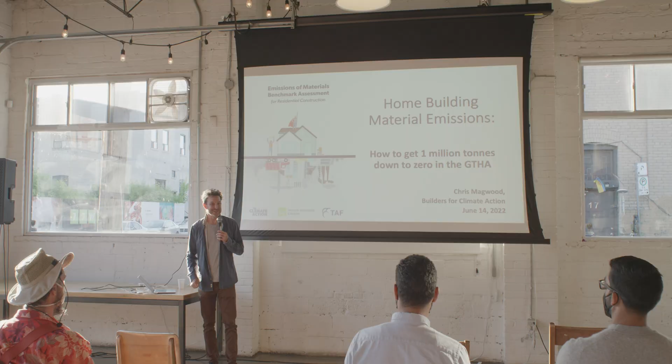And it's a study of the material emissions of residential buildings in the GTHA with the idea of, how do we try to get those emissions from where they are now, which is about 1 million tons a year, down to zero.

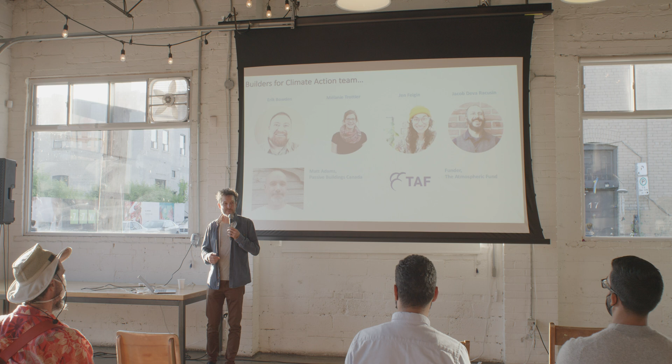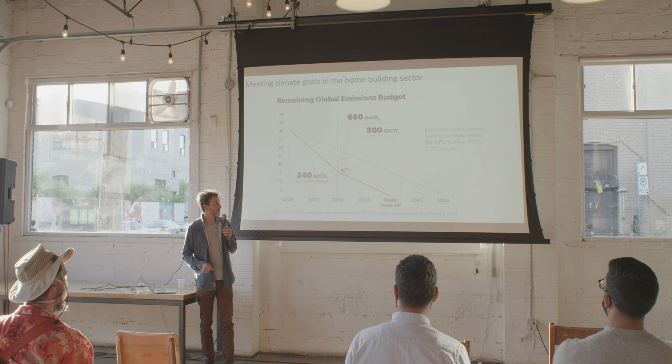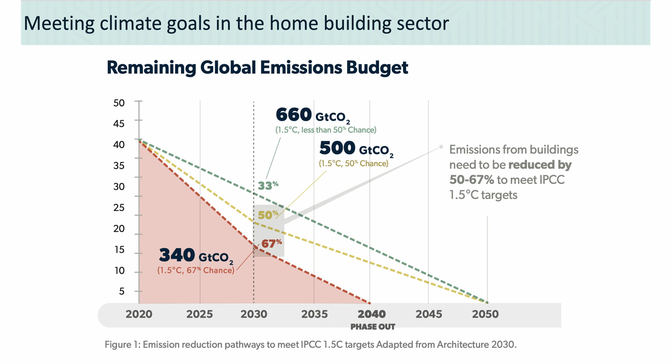So framing the problem is, I think, pretty easy. Everybody knows that if we're going to try to keep things to no more than 1.5 degrees Celsius of warming, we have to get emissions down pretty quickly by 2030 to sort of like 50 to 67% of what they are now. And so that's everything. And because I'm a builder, you're probably builders, what we're thinking about is homes and how do we get there with houses.

And just to sort of frame the challenge that's in front of us, both the Canadian government and here in Toronto, the Toronto government have targets for reductions, which for Canada by 2030 is 40 to 45% less, and net zero by 2050. And then Toronto has a specific 50% less in the building sector by 2030, and then like the Canadian government, down to net zero by 2050. They're great targets, and it's exciting to sort of be part of the movement to see if we can actually meet them.

So currently, when we think about those targets, so when Toronto or the federal government says we want to cut building emissions by 50% or get them down to net zero, they're really only talking about operational carbon emissions. So the energy a building uses, and then whatever's supplying that energy, the emissions associated with it, that's kind of what's been taking all the focus.

And so what we've been looking at Builders for Climate Action is what we call material carbon emissions. And those are the emissions associated with extracting, transporting, and manufacturing building materials. And a pretty good percentage of the full emissions profile of a building material happens in that upfront phase. If you're kind of in the embodied carbon world, you'll hear that term upfront embodied carbon, and that's what we're sort of talking about, the stuff before anybody moves into the building. What did it take to just make the materials that go into the building?

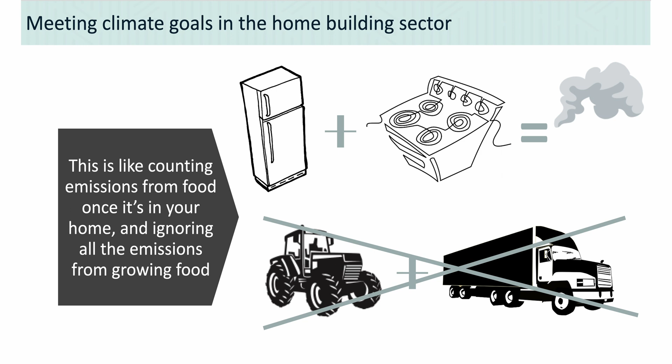And the analogy that I like to use for ignoring those material emissions is like if we wanted to think about the emissions from our food system, if we just looked at, well, what does it take to put my food in my refrigerator and cook it? I'd go, well, there's my emissions from my food. Not thinking about materials is like not thinking about the whole food production system. There's this whole other side, and just like with food, that other side is actually bigger than the side that we sort of pay attention to in the home.

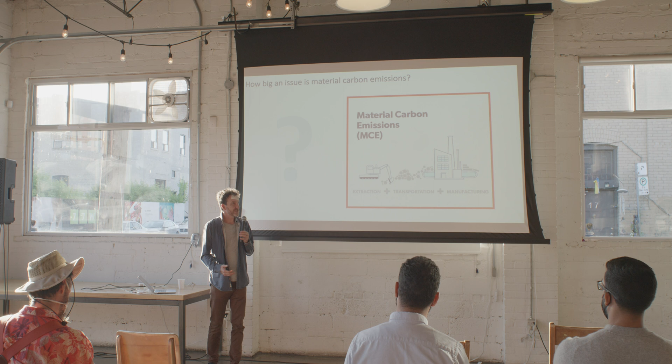So when I first started doing this, I was thinking about it on the scale of one building. I was literally just trying to back-of-the-envelope figure out, hey, this house we're doing, I wonder what the material emissions from this building are. And I got numbers, and the numbers seemed big, but what was interesting to me is, well, what happens if we look at this at scale, from more than just one house? And so the EMBARC study gave us a chance to really do that.

Before we did the EMBARC study, we did a study for Natural Resources Canada in 2021, where they gave us 190 model homes from across the country at a whole range of different energy efficiency levels, using a whole bunch of different fuels in different cities across the country. And so we got a real range of embodied carbon results, but the average across those 190 homes was 150 kilograms of emissions per square meter of heated floor area.

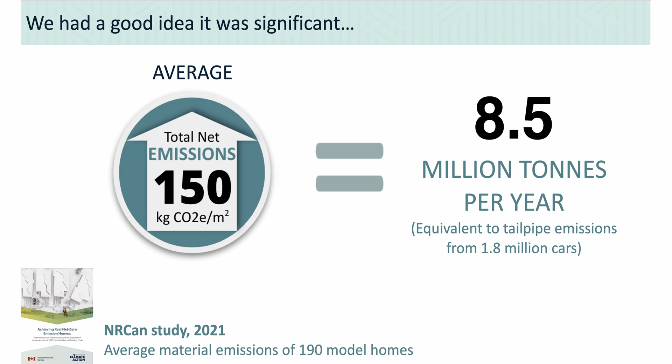And if we then take that and multiply it by the number of square meters of that kind of housing stock that gets built every year, we get 8.5 million tons of emissions per year just from low-rise residential building materials. So it's, I think, a much bigger problem. When we handed the report over to NRCan, you could hear jaws hitting the floor. I don't think anybody was expecting to see results at that scale. And so it's really great to be able to start to understand the full impact of this issue nationwide.

Part of that NRCan study involved applying different material palettes to those buildings. We had a set of plans that NRCan considers residential house standards across Canada, and we applied different sets of materials to all those different plans. And what we saw was if we just picked all the materials that are currently available and affordable and code compliant from retailers and big box stores, and put them all into one house, we could get that house from the 150 kilograms per square meter average down to 2. So essentially a more or less zero carbon house.

And if we did that across the country, that would take the 8+ million tons of emissions and drop it down to 250,000 tons. So, this vast change. I think that would be at the same level as when Ontario shut all its coal-fired power plants down, which is the single biggest emission drop in North America. That's achievable on the scale of residential buildings in Canada.

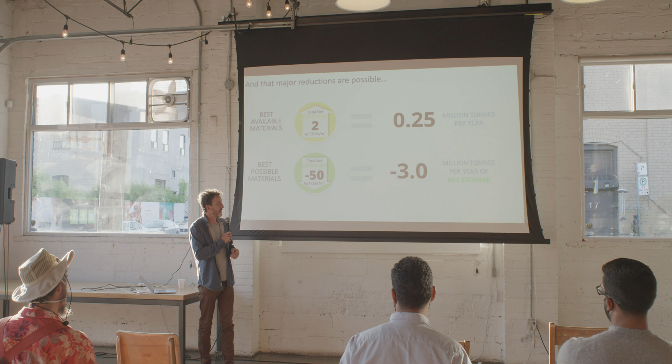And so we can make buildings that still have materials with emissions, but they have all this storage. And if you use enough of those materials, the whole building ends up in the territory of net storage, and sometimes pretty heavily so. Minus 50 kilograms per square meter was the best result from the NRCan study. We built a building for the Teachers Union in Lindsay, Ontario, that has 160 kilograms of storage per square meter.

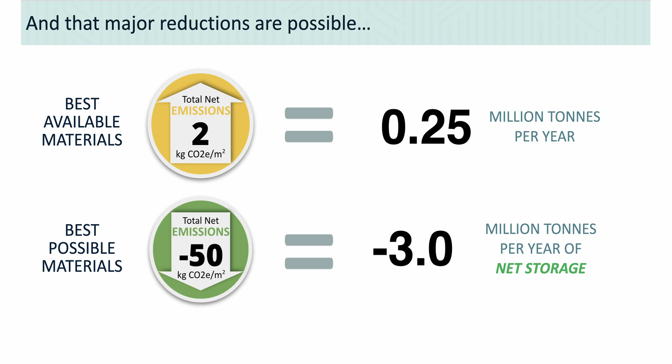So that kind of result is possible. When we're struggling with climate change, we tend to struggle with how are we going to get 5%, 10%, 30% reductions? And what we're talking about here is, how do we flip the paradigm around completely? Now there are no emissions, and we're not just not making the climate worse, we're actually making the climate potentially better by making these carbon storing buildings.

So we knew that going into this EMBARC study. We'd done that study for NRCan, but for the EMBARC study, we decided we needed to build a really robust, resilient, and easy to use tool, which we called BEAM. We ran all the plan sets through BEAM, and what we focused on were upfront carbon emissions, like I said before, the harvesting, transporting, and manufacturing of materials.

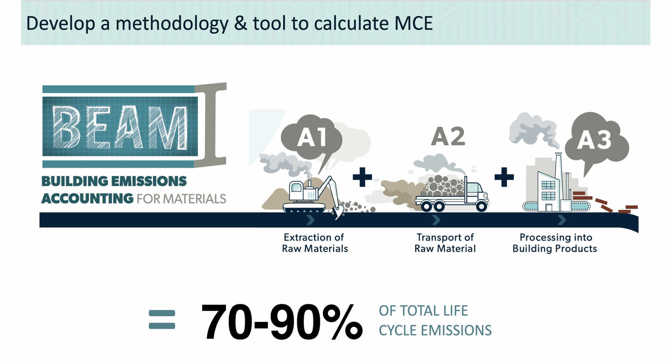That's what we were counting, and we counted those because they are the majority of the emissions from building materials over their entire life cycle. It all happens up front, and because it happens up front, these are the emissions that we need to fix today. There are end-of-life emissions and things like that, but with building materials, they're pretty far down the path, and if what we have to do in 50 years is figure out what to do with those, that'll be a pretty sweet place for us to arrive at. So, right now our focus is on these upfront emissions.

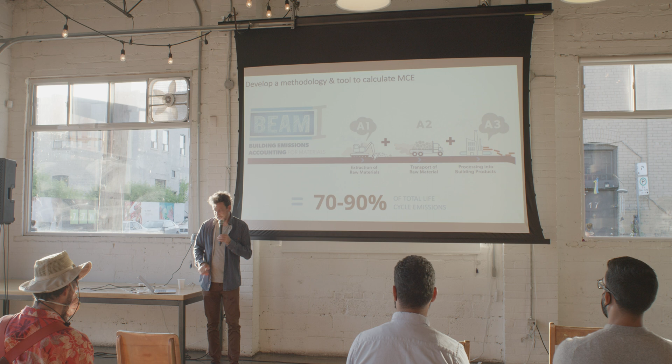So BEAM focuses on the structural, enclosure, and partition materials. We sort of picked those. I think they kind of picked themselves, partly because that's the bulk of the material, like in terms of mass in the building. It's the majority of the stuff that goes into a building. But also from a data point of view, this is the stuff that right now we actually have good data on. So there are enough environmental product declarations in these material categories that we can count everything that falls into the structure, enclosure, and partitions.

But what we can't count, because the data doesn't really exist, is any of the mechanical gear. There really aren't any environmental product declarations on plumbing, electrical, HVAC equipment. There's very little on things like millwork, stairs, appliances in particular. So all of that is not included. So when I'm giving you the numbers and the results for EMBARC, just keep in mind that we're really capturing somewhere between 50 to 60% of all of these material emissions in a building, because they're the only ones we have the numbers to count right now.

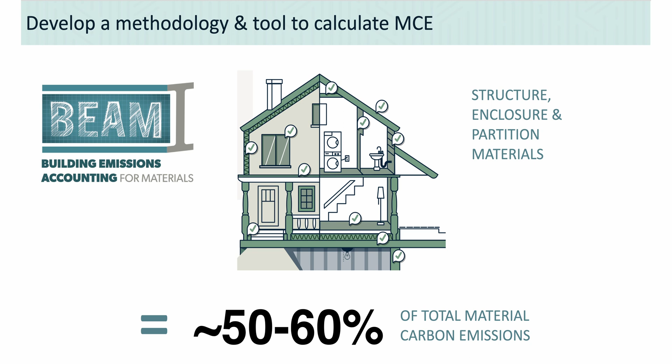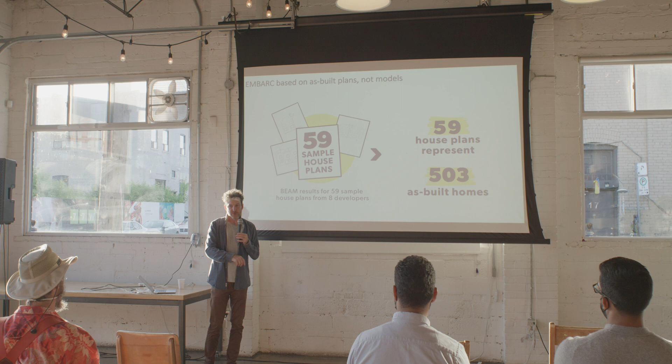And so what we really wanted EMBARC to do was reflect real as-built homes, because we'd done this study for NRCan, which was, they have model plans, and then we put model sets of materials to those plans, which was great for understanding the parameters of the topic. But what we really wanted for EMBARC was, how are people building houses right now, with exactly those materials?

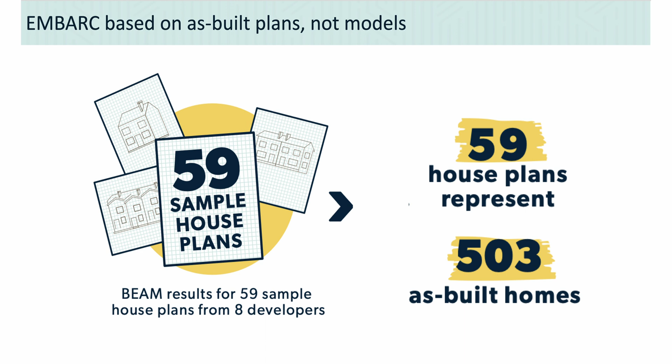So we put a call out to developers in the region. 8 developers responded with plans. They gave us a total of 59 different sets of plans. Many of those were built multiple times, the same house over and over. We were mostly going for production builder, tract builder kind of homes, because that's mostly what gets built. So we had these 59 house plan sets, which totaled 503 as-built homes, all built within the last 2 years. So it was a really good sample, and at a large enough scale that it feels pretty representative of what's going on.

And so the top level result of all of this is that the worst home in the study had 561 kilograms of emissions per square meter of heated floor area. So over half a ton. That was a real jaw-dropping thing to see. The study that we did with NRCan predicted that if you put all the worst materials together, you could end up over 500, and then it was like, oh yeah, people do that. It's not just a pretend model that we made. It's a set of materials that some builders actually do build with. So that was at the high end.

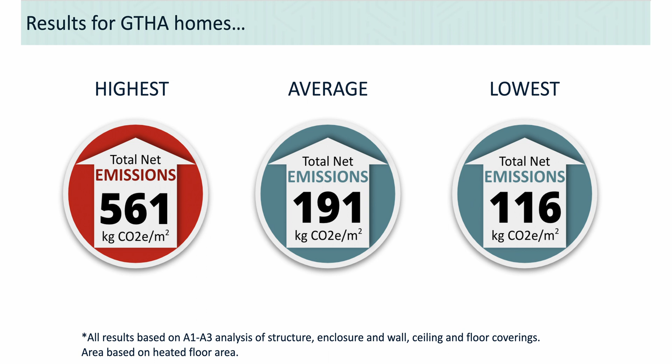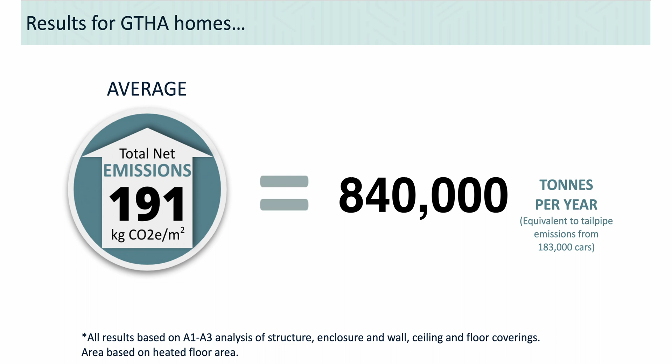The average across the set of plans was 191 kilograms of emissions per square meter, and the best result was 116. So that was the range, the high end, the low end, and the moderate bit in the middle. And at that average, and for the number of square meters that gets built in the GTHA, that means from the emissions we're counting, there's about 840,000 tons of emissions per year from GTHA homes. So we build about 17,000 single family homes, duplexes, and row houses in the GTHA in a year. So we took all the municipal data about how many square meters get built of all the different kinds of plans we had, and that was the average across that set.

And like I said, there's a lot of materials that aren't being counted. All the mechanical stuff and the appliances and things like that. Our estimates of what those are, just going from how much raw material, like how much ABS plastic is in plumbing pipes, how much copper is in a heat pump, all of those sorts of things, gave us the sense that we're pretty much counting about half the emissions.

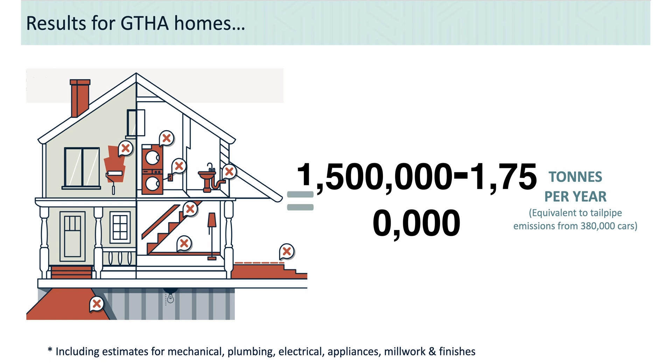So, if we were able to count everything, our assumption is that in the GTHA, the homes are actually responsible for about 1.5 million tons or a little bit more. So it's bigger than I thought for sure, and bigger than most people think.

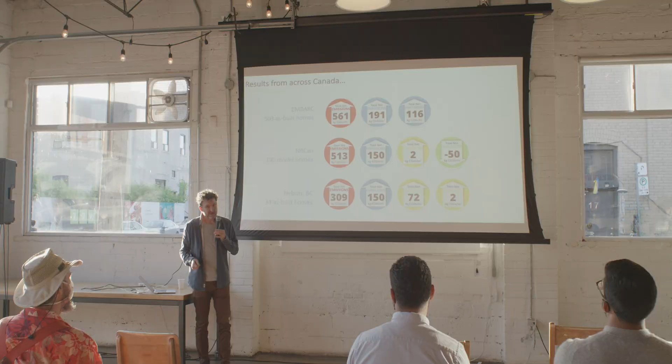So across the country, the results up there from EMBARC, that's the ones I just showed you. I talked about the study with Natural Resources Canada, that's the set of results in the middle. At the same time, or just a bit actually before we did EMBARC, we did a smaller study for Nelson, BC, where we did 34 as-built homes in that region. And what's interesting is they kind of mapped relatively closely, especially in the average. Like our model average for NRCan and our actual average for Nelson was identical, and just a little bit lower than the average for the GTHA.

So this is kind of what the best, worst, and average results looked like across those three studies, which both gives us a sense that things are a bit different in different parts of the country, but also that we have a pretty good sense that there is kind of an average in the country, and it's somewhere between 150 and 200 kilograms per square meter.

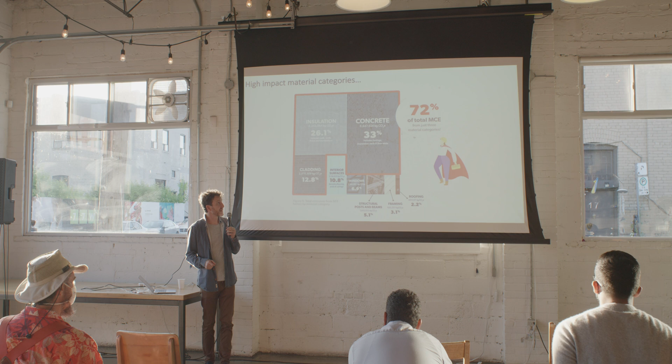And what we also learned from the EMBARC study, and this was mirrored really closely in the Nelson study, is that essentially 3 material categories are 70% of those emissions. And those would be concrete, insulation, and cladding. And the percentages were almost identical between the Nelson study and the Toronto region study. And so that gives us a pretty clear sense of, well, if we're going to tackle this, we know exactly where we need to tackle it.

There's no point sweating your roofing. It's 2% of the building typically, and so we're not going to make our big wins in roofing and framing, in any of the structural posts and beams. Windows is a little bit bigger, but we can't do much about that. Like, glass is glass, and so until somebody invents a low carbon way of making glass, that's going to kind of stay. So if we really concentrate on those big categories, that's where we're going to really drive change.

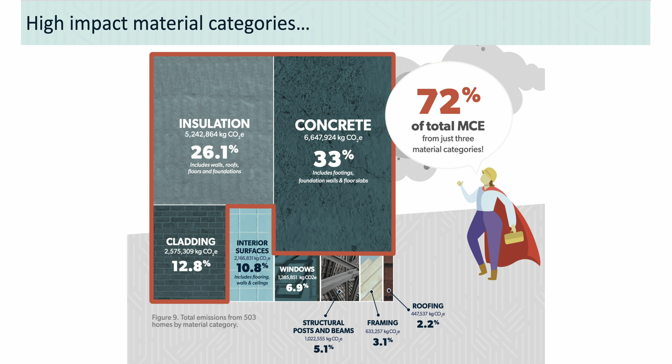So as part of the EMBARC study, we took not the worst emitting home, because it was way higher than average. We took the next highest home, which was 262 kilograms of emissions per square meter, and we thought, well, what could that builder have done to do better? And so we went through some stages of essentially material replacement, and the first step was the little green bar. That first reduction was, what's the lowest carbon concrete mix we can get in the GTHA right now, and what's the carbon footprint of that, and let's substitute that. So we had a little bit of a win from changing the concrete.

This big bar, the second bar, is what if we change the attic and the wall insulation from whatever it had been to cellulose. And because cellulose is one of those carbon storing materials, it doesn't just lower the emissions, it sort of makes them negative. So you get essentially a really big win from doing that. The next bar over is changing the continuous foam insulation on the outside of the building to a wood fiberboard insulation. And again, that's one of those carbon storing materials, so it has a relatively big impact.

The next bar is changing brick cladding. Brick is almost like 10 times higher emissions than pretty much any other residential kind of cladding. So if you change from brick to just about anything else, you get that next little win. And then the final bar is taking things like flooring products and drywall, and just looking at all the environmental product declarations and going, well, what's the lowest carbon drywall? What manufacturer has the lowest carbon footprint, and just switching out for the best available material. And those changes brought that house from 262 kilograms per square meter down to 66. So that's a 75% reduction in one of the higher emitting homes in the GTHA.

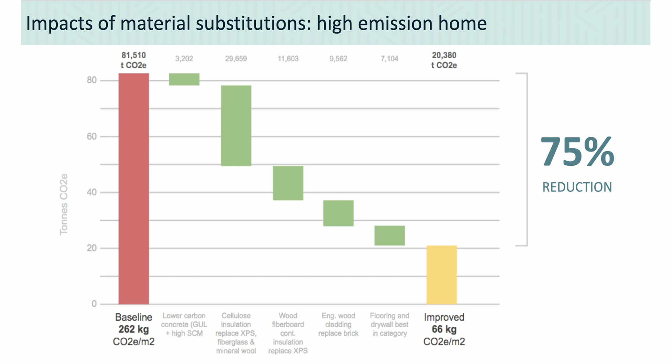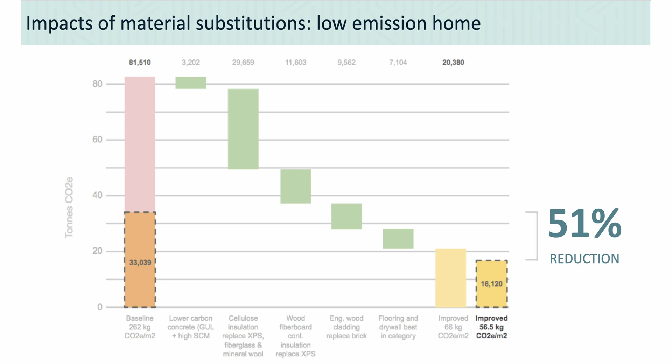And this substitution exercise was the best part of the whole study. I got to say, running lots and lots of plans through a calculator tool is not exciting, but when you see what pops out the other end, that is exciting. And it was exciting to do these substitutions because we realized, oh, Toronto has this 50% reduction target for buildings, and we just showed that you can do that, not in 8 years like today.

If builders in the region took that seriously, looked at that set of materials and went, yep, I can do that, then there we go. We've met Toronto's 2030 buildings target with both houses, the one that started off better or the one that was really high emitting. They're both at least 50% reduction, and that's what the city's aiming for, and so there's the roadmap to being able to do that.

The other thing that was exciting to look at was seeing that there was a tract builder in the GTHA whose suite of homes came in at this 116 kilograms of emissions. It's not the lowest number in the world, but it's 40% lower than the average. And this is not a low carbon builder. This is not somebody who is like, I'm going to set out to see if I can beat what's going on now by 40%. This is their affordable, business as usual, I'm just making homes to make a living. The way they do that is 40% better than the average.

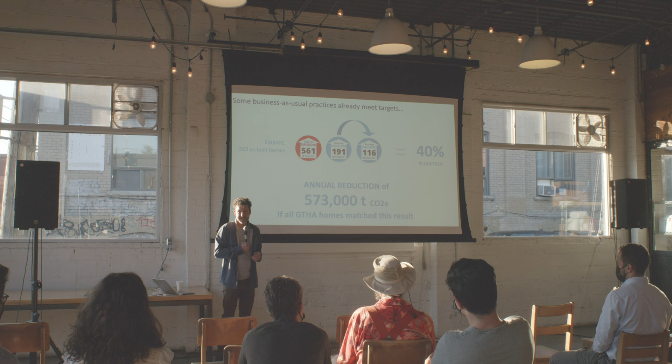And so what that tells me is this is doable. It's doable right now because there's somebody out there running a company, building a couple hundred homes a year at that level of emissions. And so if we want to get to 50% reduction in the GTHA, there's a builder who's already at 40. That's a pretty good start, and they know how to do that. They've got the materials down. They know it's affordable. They know it's meeting code. All of those questions that often come up about this. At least to get down to the 116 range, that's entirely doable.

If all the homes in the GTHA went from that average down to what somebody's already doing, that's over 500,000 tons of emission reductions per year. So that's on the table right now. If we could all do what that builder is doing, which is nothing special, let me tell you, they're making homes that look like everybody else's homes. There was no real conscious effort to make a low carbon home, but even if all the builders could get to that level, 500,000 tons of emissions a year is no small reduction to be able to make almost instantly if we wanted to.

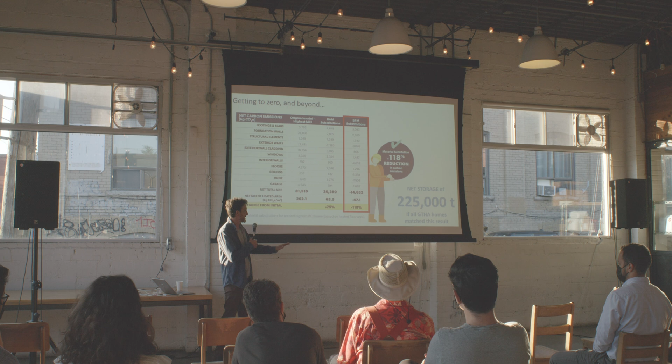And then, being the straw bale builder that I am, I wanted to push into that territory. So we did these affordable code compliant reductions and found that 75% reduction. And then we went one step further and thought, well, what if we insulate the basement with hempcrete and we put straw on the walls and do some other things like that. And we ended up in carbon storing territory, minus 47 kilograms of emissions per square meter.

And if we could do all the GTHA homes that way, that 800-some thousand tons of emissions that are happening would disappear, and we'd be putting away 225,000 tons of emissions per year.

So this is a little bit more far-fetched, but I've been building homes that do that for the last 25 years. All the questions about, will they last, do they burn, all that kind of stuff. They've been doing fine for a quarter of a century. I think we really can see that there is a pathway to being able to do that more broadly.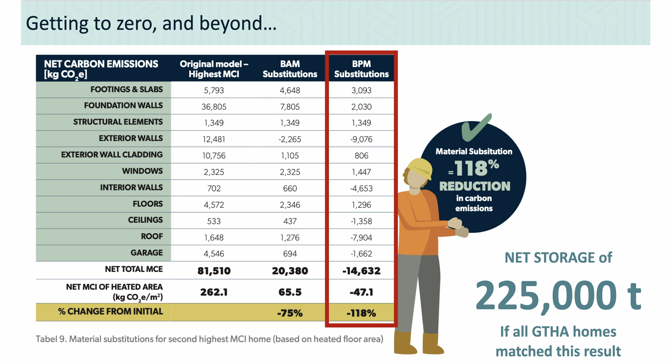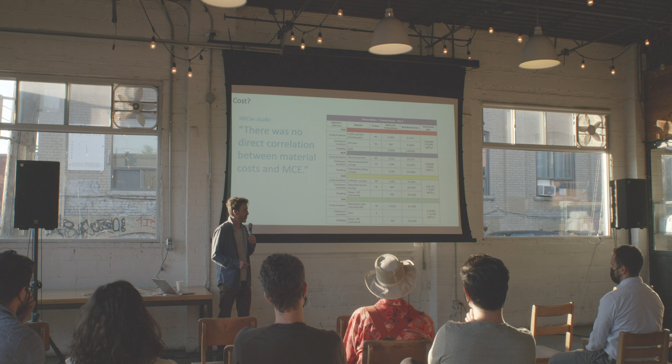And I know that the issue of cost always comes up. It wasn't in our scope for the EMBARC study to really delve into that, but for the NRCan study, they wanted us to look at material costs, so separate from labor, which can be a little bit misleading. But what was really interesting was we found absolutely no correlation between material cost and emissions.

Sometimes the highest emitting material was also the most expensive. Sometimes the lowest was the cheapest. Sometimes the lowest was the most expensive. They could fall anywhere in that range. The amount of emissions associated with the material did not predict its price.

And so, I think what that says is that you can be very strategic about it. You can figure out, dollar per dollar, where are the wins in terms of reducing the carbon footprint, and where are the things that currently you just can't go there because you can't bear that cost.

But the interesting ones here are in the middle range, where the price of those two wall systems was almost identical, but the emissions in this one are actually getting into the negative territory just for the wall system for exactly the same price. So I would love to do the cost study in more detail, but I really don't think that we necessarily have to be spending a lot more money to reduce the emissions of the buildings.

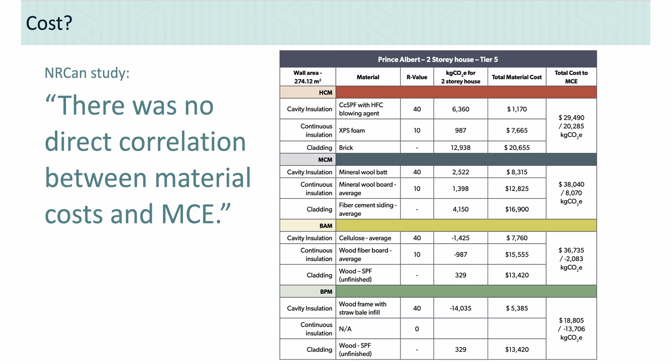So I know, being a builder and talking with builders a lot, that change is bad. My 2-year-old used to say that to me, change is bad, change is bad. And I feel like 2-year-olds and builders kind of have that same attitude. And so, my suggestion isn't that every builder in the GTHA start making straw bale homes tomorrow, because I know that's not going to happen.

But because we already know somebody is at that 116, it shouldn't be too hard for everybody who's in the average range to just start thinking about a 10% reduction per year for the next 5 years. That gets everybody to that nice 40% reduction in a reasonable amount of time, affordably, in a controlled manner, and is consistent with the national and the local goals for emission reductions. And then just keep going down that path.

If you think about 10% a year, it's not a big step to have to take, and especially once you've started making those steps, you don't have to change 30 materials on your next house. You can change 2 and do that for a year. Get comfortable with it, get that into your flow, figure out how to do it well, and then change the next 2, and then the next 2, and there's enough low-hanging fruit right now that transition over the next 10 years is, I think, highly doable.

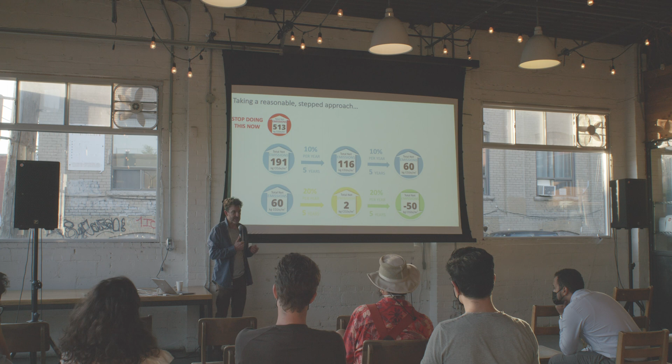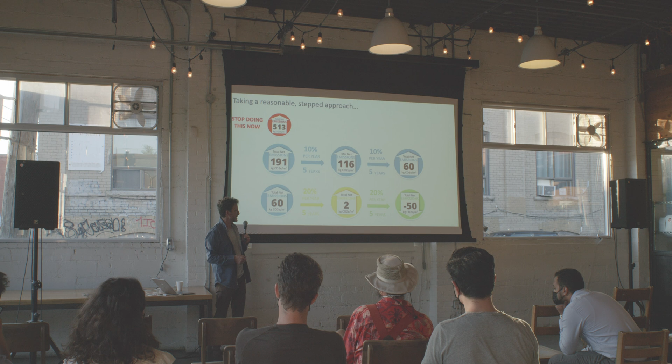So if you think about it as a 10-year plan or 20-year plan, I think it's not that outrageous to think about changing our homes from this leading source of emissions into basically carbon banks, and putting a whole bunch of carbon away and making the climate better as we build homes, instead of incrementally making it just a little less worse.

So the EMBARC study ends with a few key points. The first one being just encouraging everybody in the home building sector to just start thinking about measuring these emissions. So our BEAM tool is now available for free. So there's a really quick and easy tool for doing that. We also helped NRCan make a kind of sister tool that they call MCE squared. Both of those work from the same data set. So there's free tools to help you measure it.

It's amazing when you start measuring. I've been doing work for developers now. As soon as you see the numbers, you start having those aha moments of like, oh, I could change that. And the tool is really great because it puts all of the results for all of the materials right in front of you.

So if you're looking at insulation, if you're looking at cladding, you've put all the dimensions of your building in, you see the results for every potential cladding material that's on the market. You see the results for all the insulation. So you get this really great side-by-side comparison. So I think measuring is really important.

Demanding transparency. So I've mentioned that in some material categories and for some manufacturers, we don't have the environmental product declarations that give us that data. So we all need to ask them for it. If you can't find it, if it's not, say, in BEAM or it's not in MCE squared, bug the manufacturer. We've got a template letter on the Builders for Climate Action website. Write to them and say, I'm not going to buy your product anymore until there's an EPD. And it's surprising, they start to want to produce those.

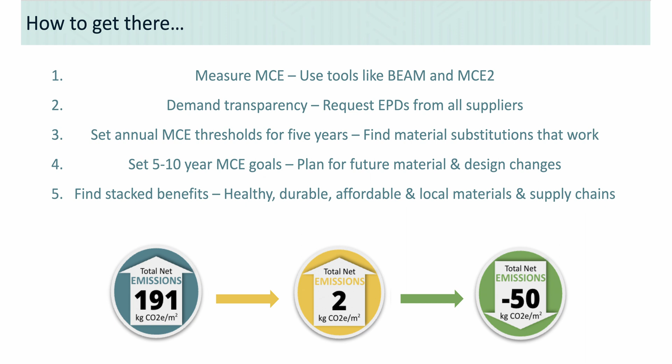They come from supply chains that are closer regionally and support different aspects of our community, especially a lot of the agricultural residues. We can either pay farmers for their waste to put into buildings, or we can pay oil companies for their stuff to put into buildings. There's great reinforcing aspects to local economy and local supply chains if we start thinking about this too. So it turns out that it's not just, oh, you get great embodied carbon numbers. You actually get healthier, more resilient buildings and healthier, more resilient communities from going down those paths.

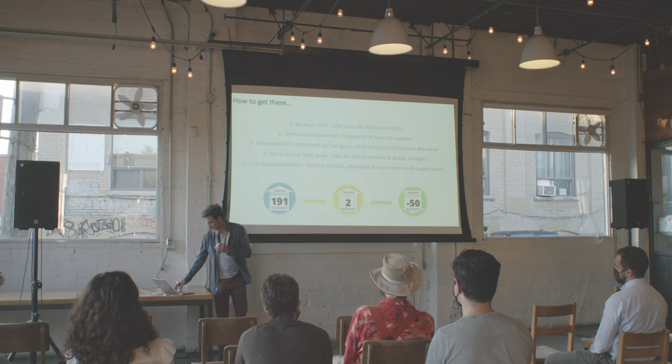So that's kind of the high-level summary. I would encourage you to go either to the Builders for Climate Action website or the Passive Buildings Canada website and download the report. It goes into a lot more depth. It goes into all the material categories and shows you a breakdown of how we made all those substitutions, and there's a lot more depth to the actual report than I could cover here. So that's available for free from either of those websites.